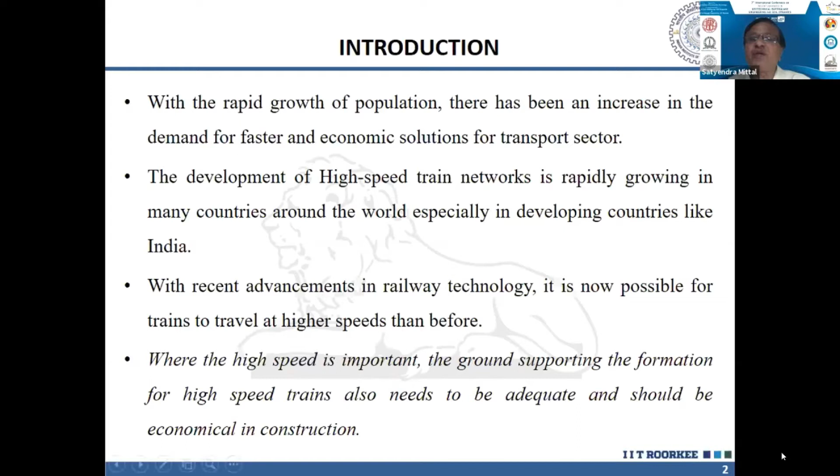This is the rail track adopted by Indian Railways, given in railway code GE-1. My co-authors and colleagues in this session are all very expert, and I know them personally, including the chair and co-chair. Railways, Indian Railways, fortunately or unfortunately, has only one code so far, and this code, GE-1, was prepared by the British long back.

When I started this research project for Indian Railways on high-speed train tracks, I requested Indian Railways to provide me whatever information or codes they have. But I was taken aback and surprised when they told me there is only one code, and on the basis of that, all the trains in India are running.

So this is the code, and you can see the ballast layer, which we generally see whenever we travel by train, and this is the sleeper, and these are the rails fixed on that. Below this ballast is the blanket layer, which comprises the subballast and the cohesionless soil generally. But we generally prefer the locally available soil; if the locally available soil is cohesive soil, then they adopt cohesive soil also.

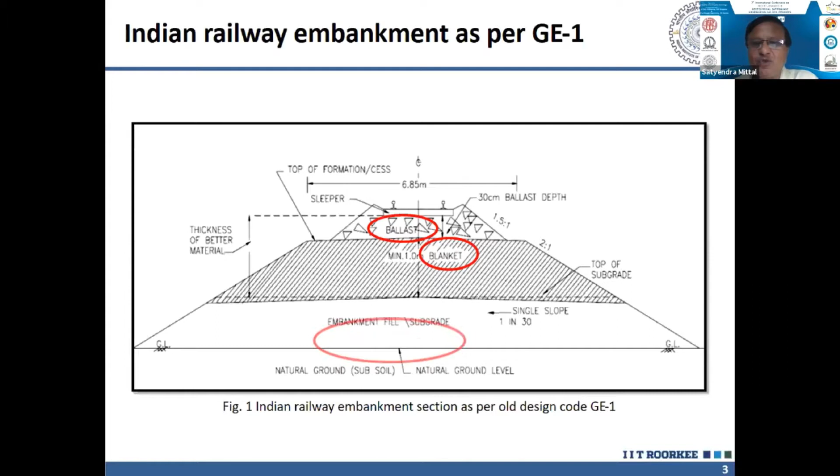The only thing Indian Railways so far adopts is the CBR value. They have divided soil quality into three parts: SQ1, soil quality 1; SQ2, soil quality 2; SQ3, soil quality 3. For SQ1, SQ2 and SQ3, they have earmarked certain CBR values. But when we see codes in other countries—Spanish codes, German codes, codes of other developed nations including Japan—they do not generally use the CBR value; rather, they use the EV2 value, which I am going to discuss now.

Let us see the functions of ballast, important to understand before I come to the main point of my presentation. Ballast, as seen in this picture, is the layer of free draining coarse aggregate comprising graded crushed stone, granite and basalt, used as a tension elastic support for resting the sleepers. This is the main function of the ballast: it transfers the load from track to subballast and drains away the water from rails and sleepers.

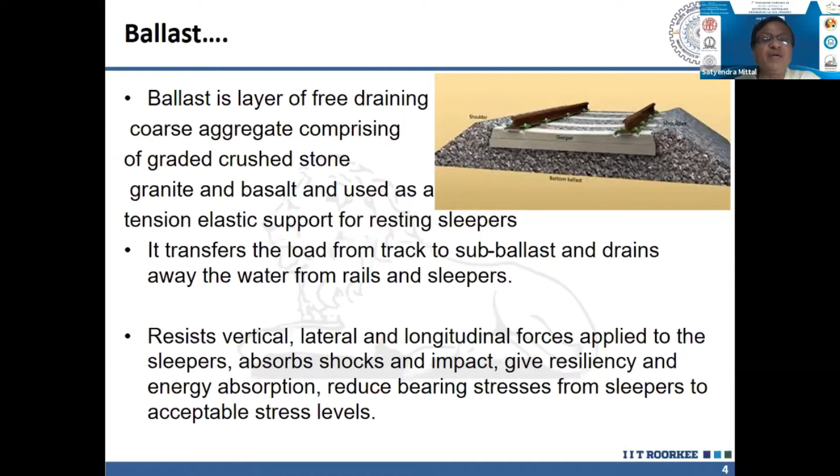It resists the vertical, lateral and longitudinal forces applied to the sleepers. It absorbs the shocks and impact, gives resiliency and provides energy absorption. It also reduces the bearing stresses from sleepers to acceptable stress levels.

Now let us see the function of the subballast, which is just below the ballast. Subballast is also part of the blanket, as I said in the beginning. In this picture we can see that this is the blanket layer, and this is the train through which I took this picture.

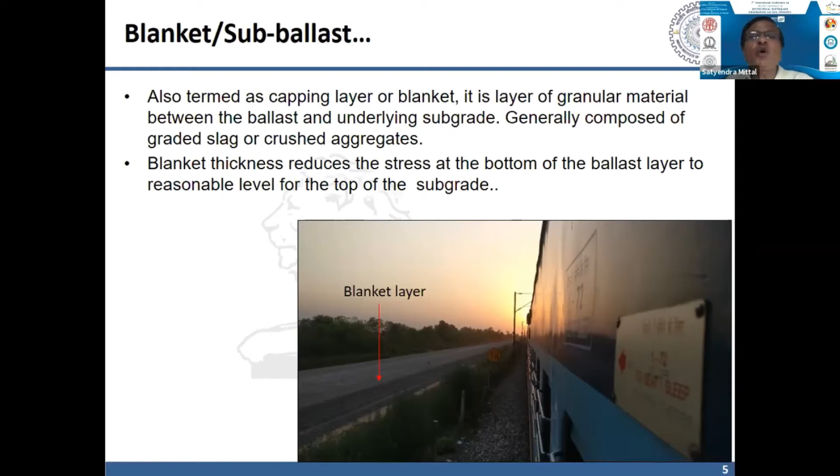The subballast is also termed as capping layer or blanket. It is a layer of granular material between the ballast and the underlying subgrade. Subgrade is the naturally available ground where the rail track is proposed, generally comprising graded slag or crushed aggregates. The blanket thickness reduces the stress at the bottom of the ballast layer to a reasonable level for the top of the subgrade. So these are the functions of the blanket and the ballast.

Now this is the subgrade layer, which is naturally occurring strata at the site. The subgrade is the foundation to the entire railway structure, as it transfers load to the natural ground. If the quality of the soil is not adequate, it must either be replaced with a stiffer material or be reinforced. So if the soil is very bad at the site, maybe cohesive soil, or still worse soil, or the area is in a flood zone, then we lay some soil and create a subgrade.

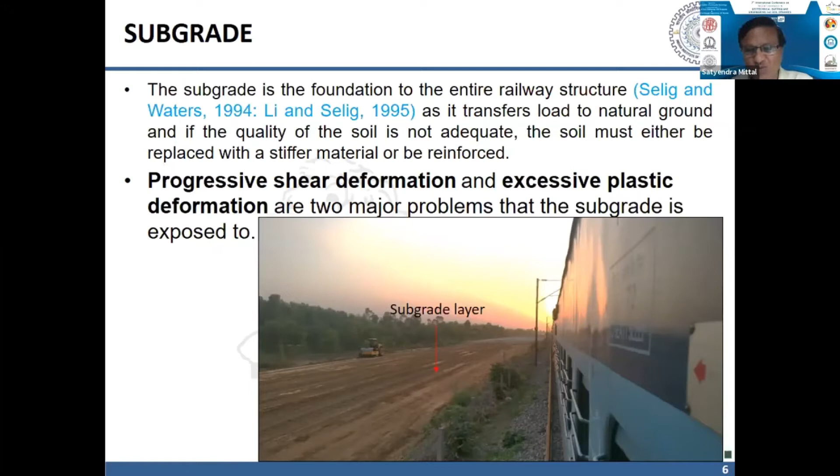Then the next part is progressive shear deformation and excessive plastic deformation, two major problems that the subgrade is exposed to. So let us try to understand what is progressive shear deformation.

Let us say this is the clay subgrade, and above this we provide the blanket, the subballast and the ballast, an all granular layer, and then the sleeper like this. This is a stable site, but when it is clay soil, due to the frequent movement of the train, the clay subgrade behaves like remolded clay, and this generates heave, as we can understand from this figure.

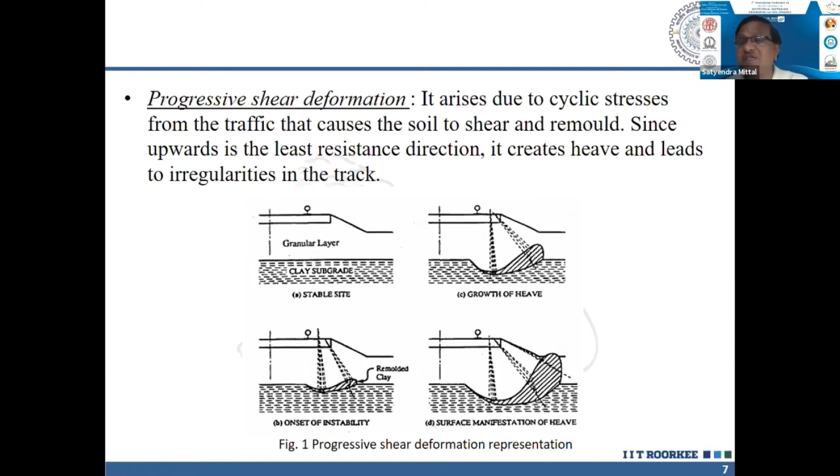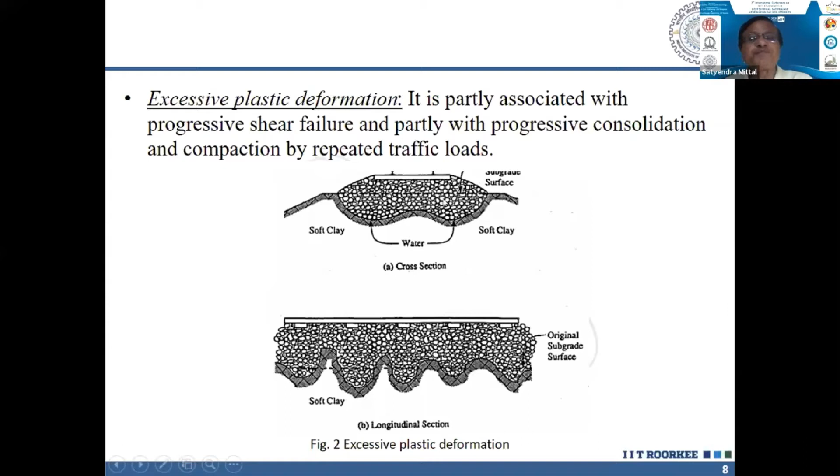Due to this, there are frequent deformations and distresses developed into the rail track, which also leads to plastic deformation. Plastic deformation is partly associated with progressive shear failure, because if shear failure is progressive in nature it leads to plastic deformation, and it's partly associated with progressive consolidation and compaction by the repeated traffic load. So this is the cross section and this is the longitudinal section of the clay subgrade area.

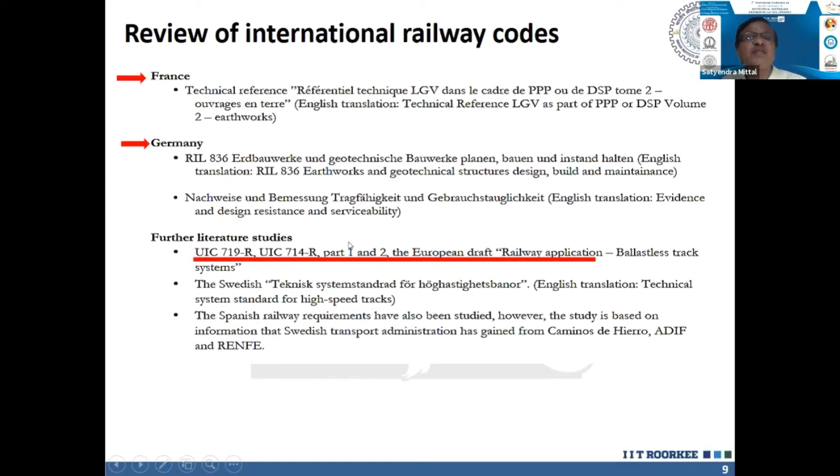These are some codes followed by us in our research work: the French codes, the German codes, and others also adopted in the present research. These are the UIC codes, adopted mostly by European nations. We have also studied the Swedish codes, because these are really very nice codes. In India also, since I am part of the team of High Speed Rail Corporation, I insisted that we should use the EV2 value, which I am yet to discuss.

Friends, from these codes, the essence is that the earthwork is highly dependent on its compaction quality. As per UIC code 719, the compaction should achieve minimum deformation modulus with a homogeneous distribution. This is a very important point.

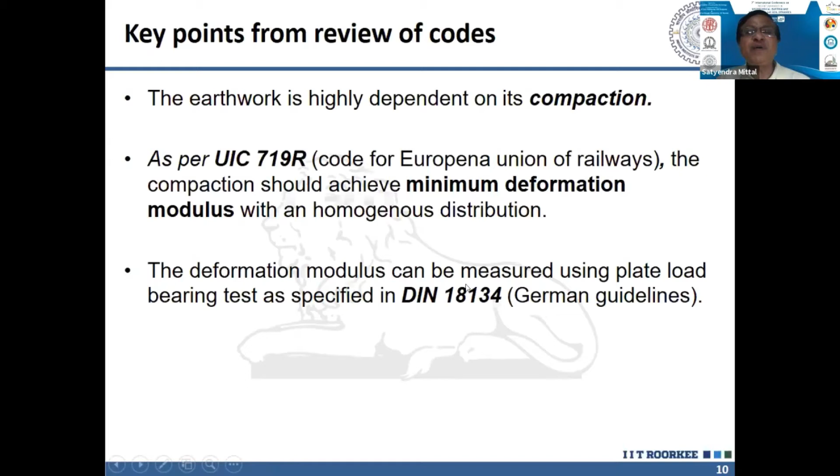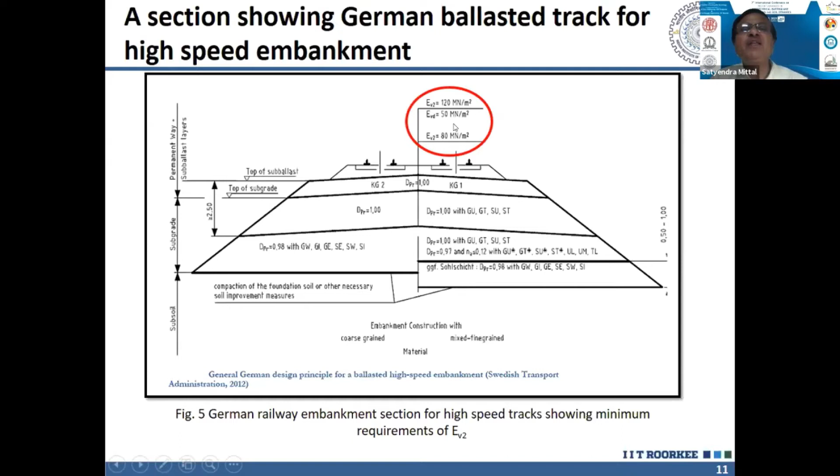The deformation modulus can be measured using the plate load test as specified in DIN 18134, the German code. This is the rail embankment adopted by the German railways. Here we can see that they do not consider the CBR value like in India. They consider the EV2 value, and EV1, EV2 — these are the important parameters they have created, and mostly countries in Europe are adopting the EV2 system only.

This was the Indian Railway embankment, as I had shown you earlier. Now, with my constant insistence on the Indian Railways, that code has been revised, and this is code GE-14. With my constant persuasion with the Indian Railway authorities, they have now agreed to include the EV2 value also in the Indian Railway codes. So if EV2 is about 100 MPa, it is equivalent to CBR 25. In the near future, Indian Railway will never talk of the CBR value, because CBR is now an obsolete parameter.

Similarly, this is for the ballast and subballast area, blanket area. For the area below this, the embankment fill, the EV2 should be, in any case, minimum 45 MPa.

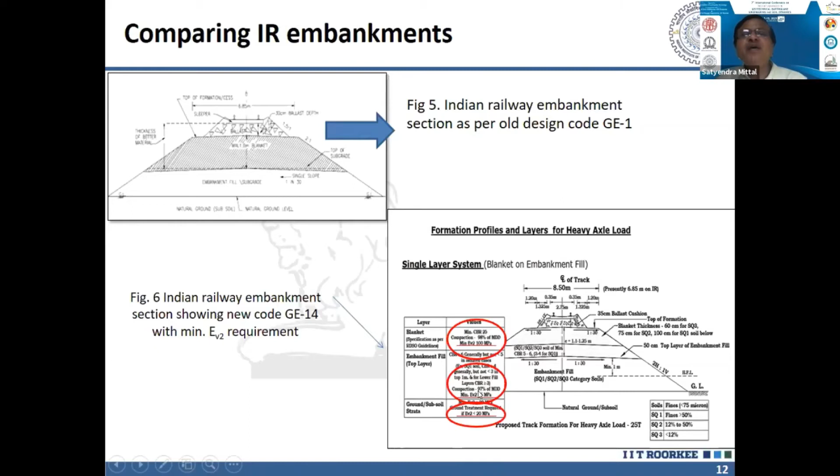So EV2, how do we achieve EV2 value? That I will explain to you.

On comparing old and new section from the design code, it can be seen that the height of the embankment has been increased with the inclusion of the blanket layer and by addition of the embankment fill. Well friend, this point I have to elaborate a little more.

Due to the lack of knowledge in Indian Railways so far, they were talking of CBR only, and wherever higher stiffness or higher resilience was required, the railway engineers - I had been interacting for the last 2 years with the top engineers of Indian Railways - I asked them what they will do with high speed rail. They say they will increase the blanket layer thickness.

You see, that is the irony of the fact that they have only limited knowledge - that if we increase the blanket layer thickness, the stiffness of the rail track will increase. It's an irony. Whereas you all will agree with me that blanket layer material is a mining material, and in India mining is banned now. Only limited mining is allowed, that too for national projects. So because mining material is a luxury, we have to look for alternate solutions.

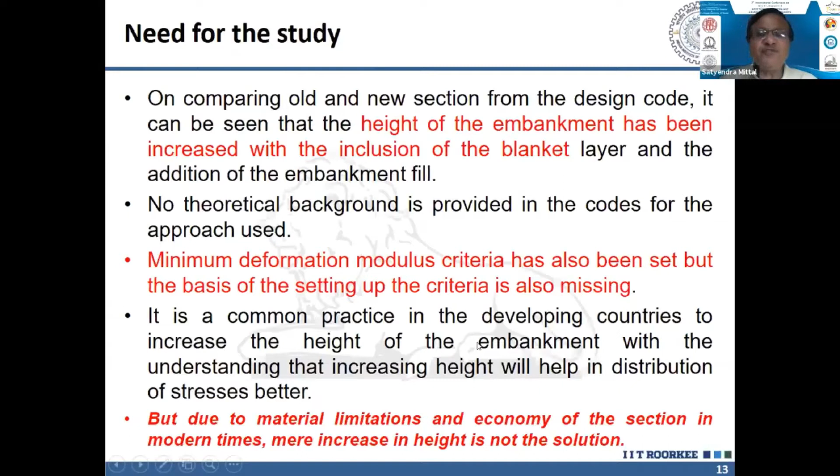So now the deformation modulus criteria - we will see what is the deformation modulus criteria. As I said, my presentation is limited to the laboratory test results only.

So now whatever laboratory results we have achieved, we have compared it with the European codes, and now we have also determined the deformation modulus of the embankment. I will show you that by adopting the deformation modulus criteria, which Indian Railways was never adopting, how economically the rail tracks can be created or constructed for high-speed trains.

So the study is planned to find out the minimum required deformation modulus for the design of the Indian Railways embankment, to economize the section. This is the main focus of our research work.

So now friends, I have tried to explain in very simple terms. Load intensity as per the German code required for a good rail track is 500 kN per meter square. This is the recommended value for high-speed trains in Germany.

Now, if I talk of the length of the sleeper in India, it is 2.75 meters as per RDSO guidelines, and the average width of the sleeper is around 246 mm. So if I calculate the area as 2.75 into 0.246, and multiply it with 500, then I get the load around 34.49 tons.

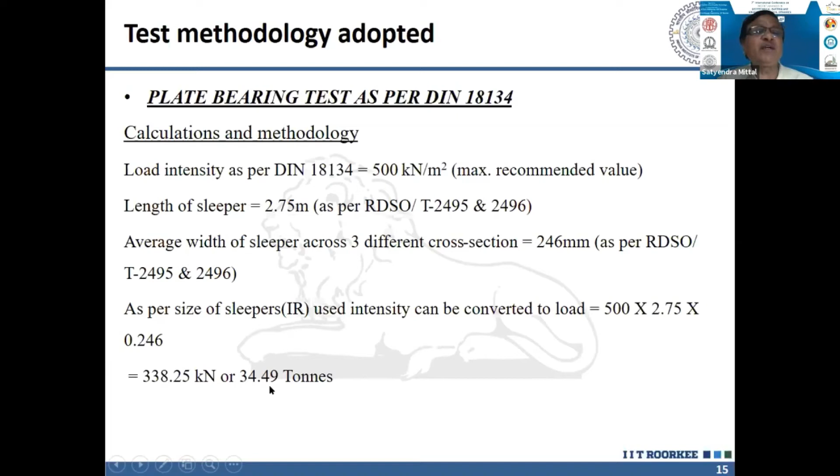That much load comes on the sleeper. As per Indian Railways loads, generally most tracks in India are designed for 16.5 tons load. Germany designs tracks for 35 tons and sometimes more.

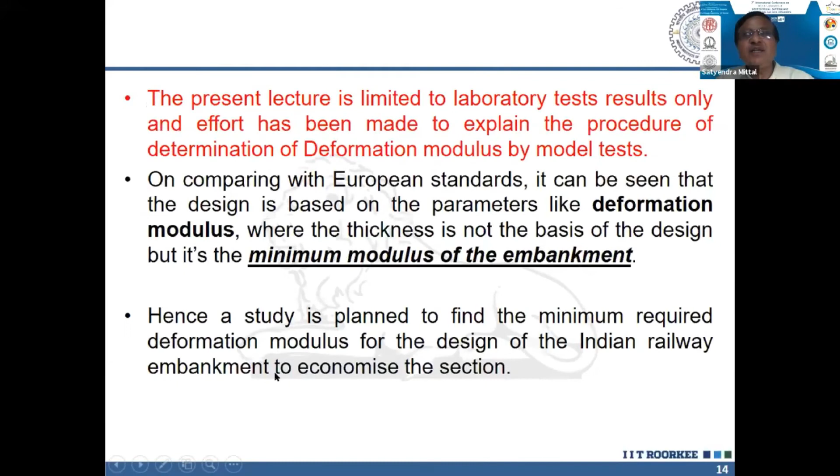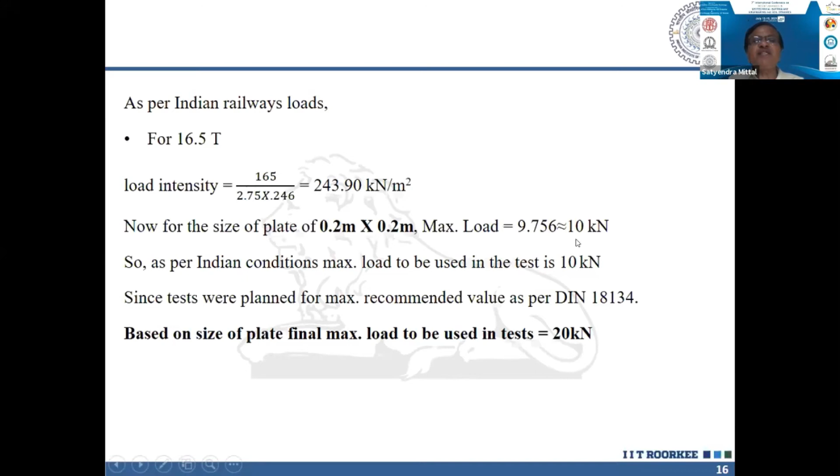So now if I calculate the load intensity for 165 kN, meaning 16.5 tons, the load intensity required is 243.9, and if I multiply it with the size of plate which I have used, we require the maximum load as 10 kN. So as per Indian conditions, the maximum load to be used in the test is 10 kN. Whatever is the test plate, accordingly we can designate the load required for the model test.

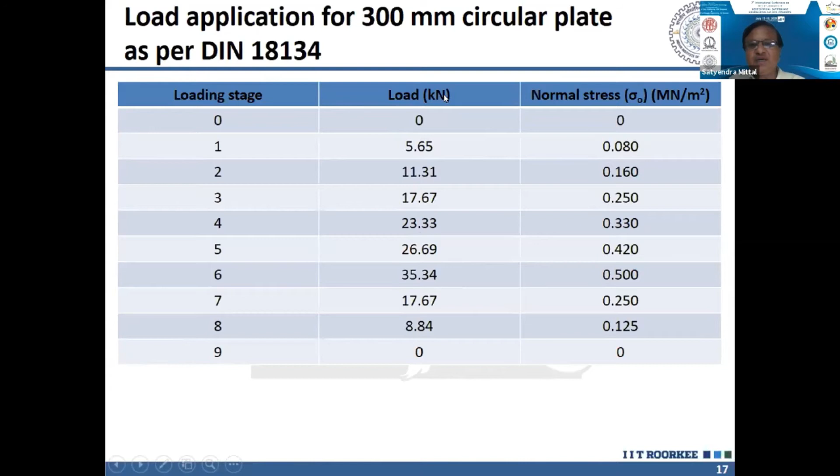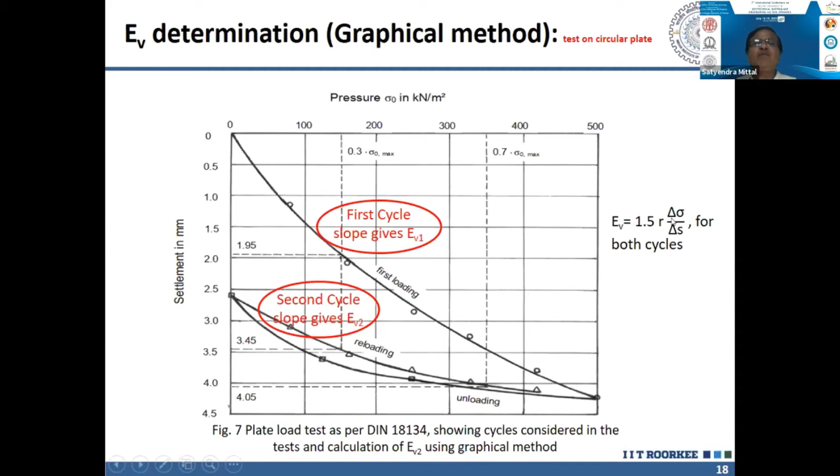EV1 or EV2 follow a general formula for calculation: 1.5 into R, where R is the radius of the test plate, and delta sigma upon delta S is the slope of the curve. This is the formula used for computation of the EV value.

Now, for calculating the settlement of the rail track, this formula is used: S equals A naught plus A1 plus A2 into sigma naught square. Here sigma naught is the average normal stress below the plate, A naught, A1 and A2 are the constants of the second degree polynomial, and S is the settlement of the loading plate.

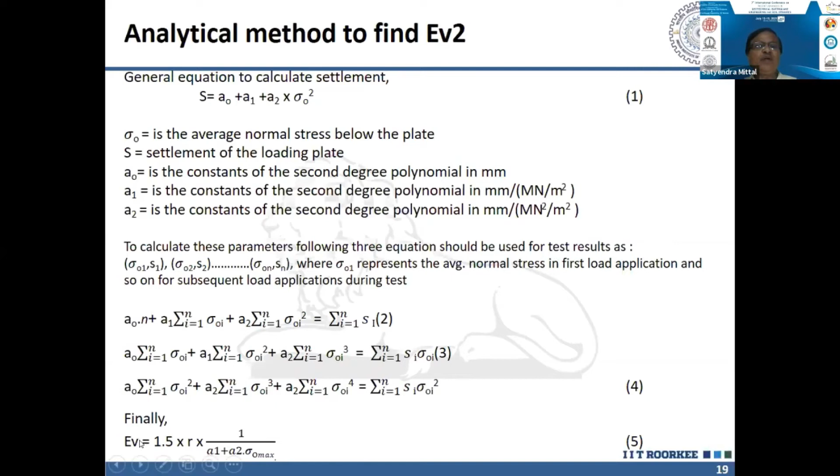A naught, A1 and A2 are calculated from three equations. We have three equations and three unknowns, A naught, A1, A2, and by solving these equations we can calculate them, and after that finally calculate the settlement, and then finally calculate the EV value also.

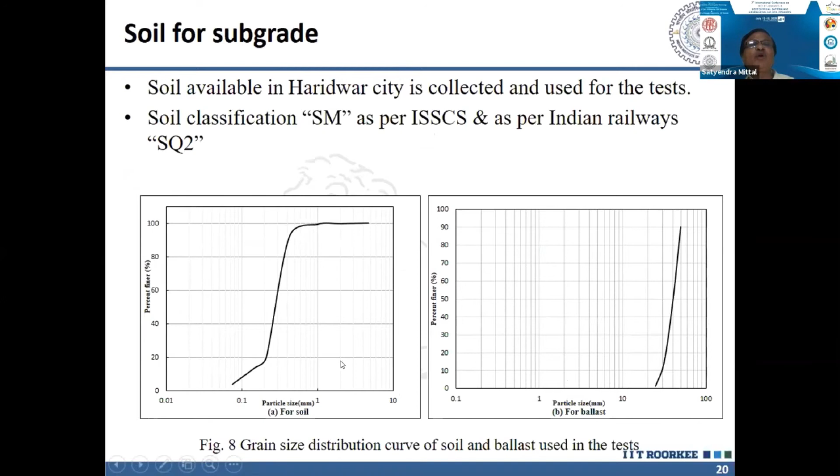These are the grain size distribution curves of two different types of soil - this is for ballast and this is for the soil which we used in our model test. The soil classification was SM, collected from Haridwar. Haridwar has a very big yard of Indian Railways, so they provided us the actual soil of the track where the high-speed rail track had to be constructed near Haridwar also.

Although we have done more than 100 tests, I am limiting this presentation to just 5-6 tests. The objective was to find the minimum thickness required for a suitable EV2 value for the high-speed rail track, and the parameters we adopted were as per the German code only.

What were the combinations? We took the subgrade of varying thickness to find the suitable thickness of the subgrade, because our economy starts right from there. Second, in the subgrade we used varying blanket thickness, because the blanket occupies the maximum mining material, so there also we wanted to economize the blanket thickness. Then subgrade plus blanket plus geogrid, then subgrade plus ballast, meaning after removing the blanket totally - subgrade and ballast only.

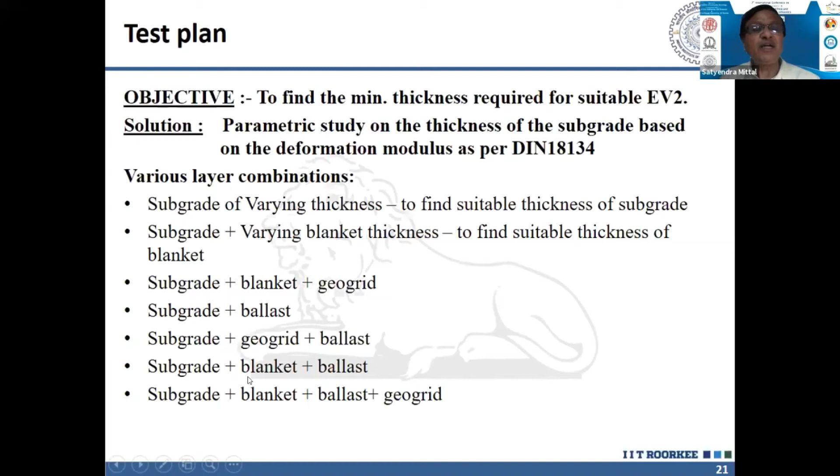Then subgrade plus geogrid plus ballast, then subgrade plus blanket plus ballast, and then subgrade plus blanket plus ballast plus geogrid. So for all these cases, we have determined the EV2 parameter.

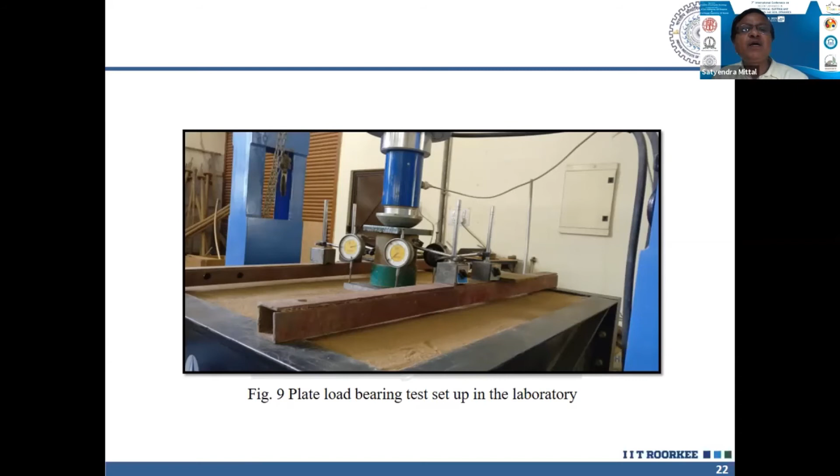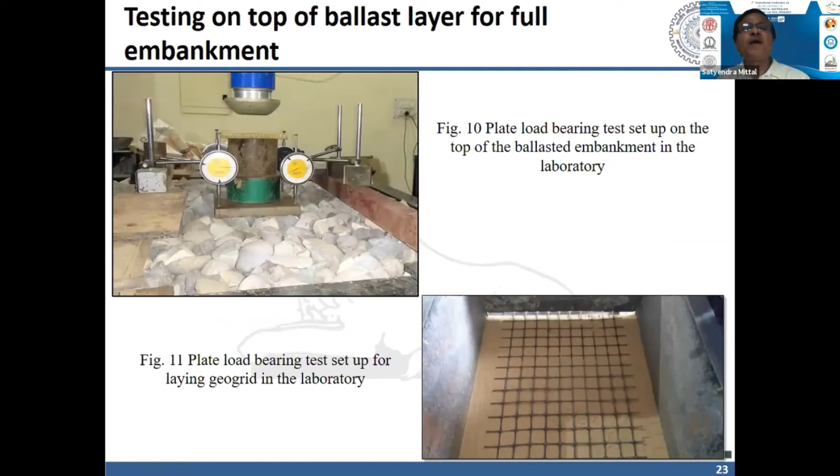So friends, this is our test setup in my geotechnical lab. The same ballast which Indian Railway had provided us was used, considering that it is a ballast layer for the full embankment - right on the subgrade, totally ruling out the blanket layer and providing the ballast embankment only. This was, of course, with the geogrid.

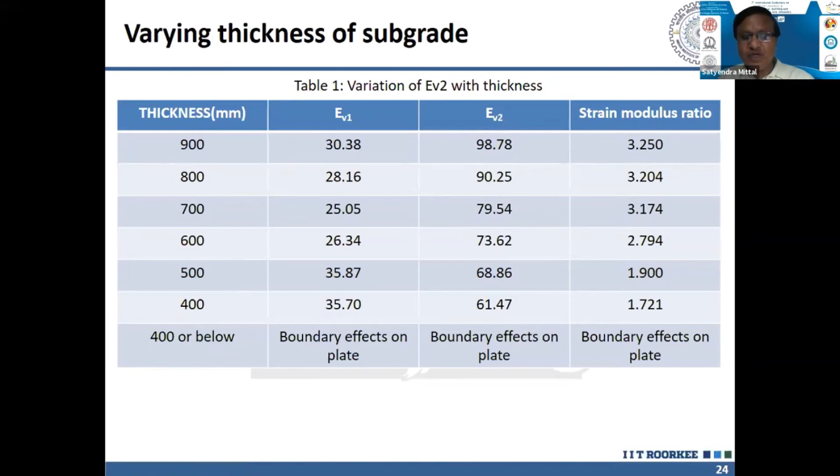So now you see, we had chosen different thicknesses of our track, and then EV1, EV2 values were computed by the same test, the pictures of which I had shown you just now. And you see, if I take the ratio of this and this, the strain modulus ratio comes out as 3.25, and ultimately the modulus ratio is very important for designing the advanced tracks for high speeds.

So here it is a subgrade of 400 thickness, and EV2, as I had shown in the initial slide - now GE14 of Indian Railways, which has been revised after my persuasion, says that the minimum required EV2 value for subgrade should be 45. And you see, simply by doing our analysis and convincing Indian Railways, I had shown that simply by proper compaction and by trying this methodology which we have evolved, the EV2 value achieved is 61.47, which is higher than 45, the minimum required.

Similarly, where the subgrade is of 500, we got the EV2 value as 68.86, so the required modulus is achieved there too. Then we tried the subgrade of 500 plus blanket of 200, and we got the EV2 value still higher, 86.54.

For this blanket combination, the minimum required EV2 is 100. So we tried some more permutation combinations, and using a single layer of geogrid, we got the EV2 value as 100. So the required thickness of the blanket, as per the Indian Railway specification, is subgrade 500, blanket 200, now with one layer of geogrid. Then, if subgrade is 500 and ballast is 300, we got the EV2 value higher than 100.

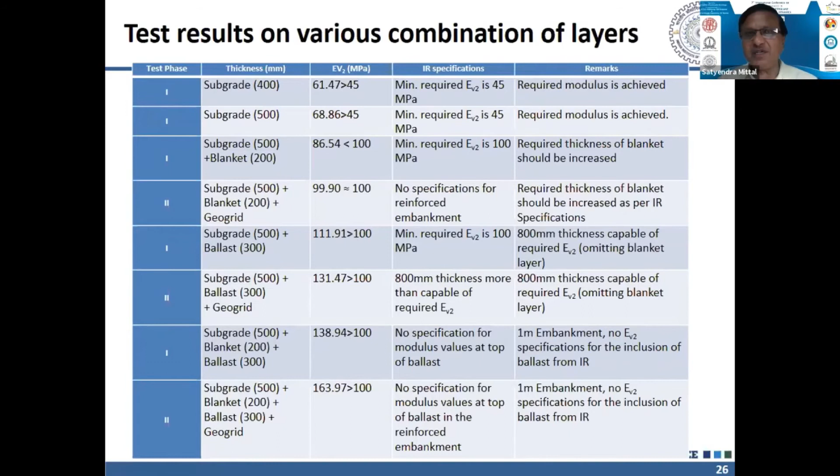When we showed these results, the tests were conducted in the presence of railway engineers, and now they are well convinced that EV2 is the right parameter for designing the rail track.

Now let us see the results we obtained from our current model test. We got the EV2 value as 138.94 when our track was ballast 300 and blanket 200, and the subgrade was 500. This is the model we created in our large-size steel tank, the picture of which I had shown you.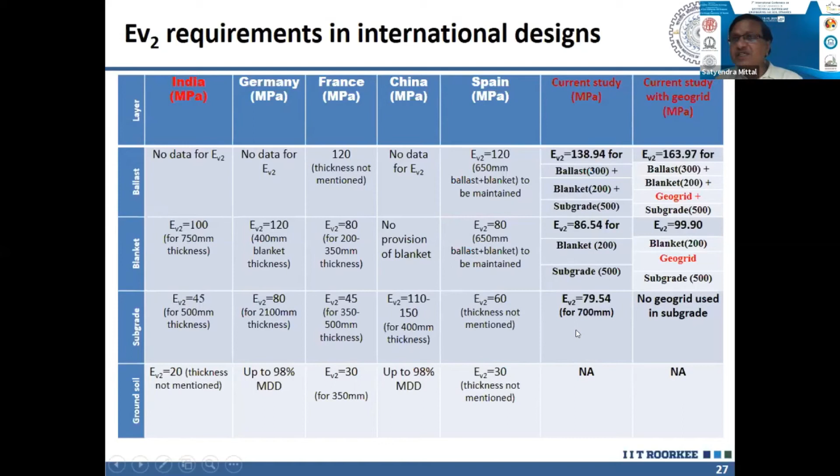This value is further increased to 163.97, and then this value was increased to 99 by using a geogrid, and here this value is already higher than 45. These are the advantages, and now we are able to convince the Indian Railway authorities.

So these are the comparisons of the Indian Railway design with the current study. They had been adopting the thickness of the top layer of embankment fill as 500 mm, and we are also adopting 500, because the Indian Railway authorities were not agreeable to reducing this embankment fill at all. So we kept this the same.

Now for SQ2, second quality of soil, they were adopting 750. We have shown them, by conducting the actual prototype test in our laboratory, that a 200 mm blanket thickness is good enough. Similarly, the ballast thickness on top was 350; now we have shown that 300 mm is good enough, because once I get the required EV2 value at 300 mm — and EV2 is a well-adopted parameter by all developed nations — we should also adopt it.

So the total height of embankment in Indian Railways is generally 1.6 meters, but now in India we can have a 1 meter total thickness of embankment. These parameters are for the no-flood zone. If the track is passing through a flooding zone, then the Indian Railways add a further 1 meter.

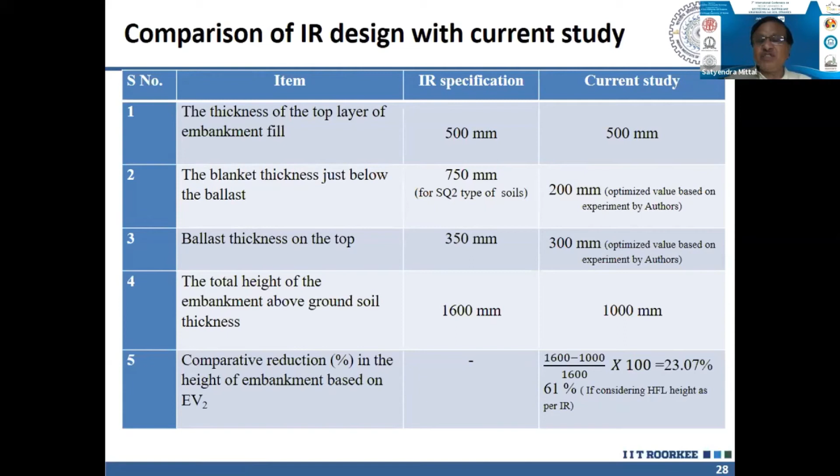So if I compute the economy achieved by adopting the EV2 parameter using 1600 mm, the economy is higher than 23%. And when I use 2600 mm, by adding 1 meter for the flood zone — meaning the additional height chosen to meet flood eventualities — then the economy is 61%.

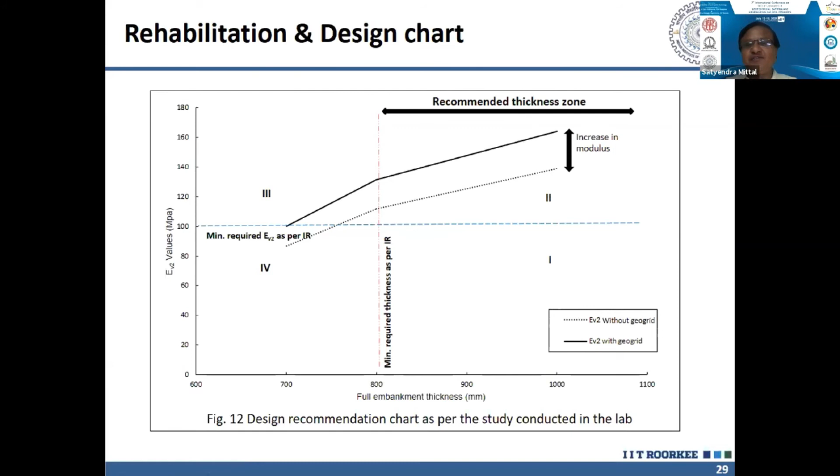You see this dotted line, this is the EV2 value without geogrid, and this solid line is the EV2 value with the geogrid. This is the increase in the modulus value simply by using one single layer of geogrid. This curve I am showing you only with the single layer of geogrid. We have done a lot of tests using 2 layers of geogrid also, and there it is a phenomenal growth in the value of EV2.

Friends, I would like to conclude now that deformation modulus can be used as a parameter to evaluate the performance of the embankment with the design values. Deformation modulus is very sensitive to the compaction effort applied to the underlying layer. Hence, degree of compaction control should always be of high quality.

Then, to meet the required deformation modulus EV2 now set by Indian Railway, the height of embankment can be reduced, because earlier they were believing only in the CBR value. But now, fortunately, I have deviated their mind, meaning the mind of the Indian Railway engineers, so that now onwards they will be using the EV2 value. The total reduction in the height of embankment based on the modulus values is nearly 23%, and geogrids, as expected, enhance the EV2 value by 28%.

In addition to other benefits, there is reduction in the breakage of ballast and prevention of the penetration of ballast into the subgrade. As we all experts sitting in this session know, when we provide the geogrid, it provides a positive confinement to the ballast, and because of that the ballast do not migrate to other places due to movement of the fast speed train. So the ballast remains in its position only, and by that it provides further confinement to the overall rail embankment.

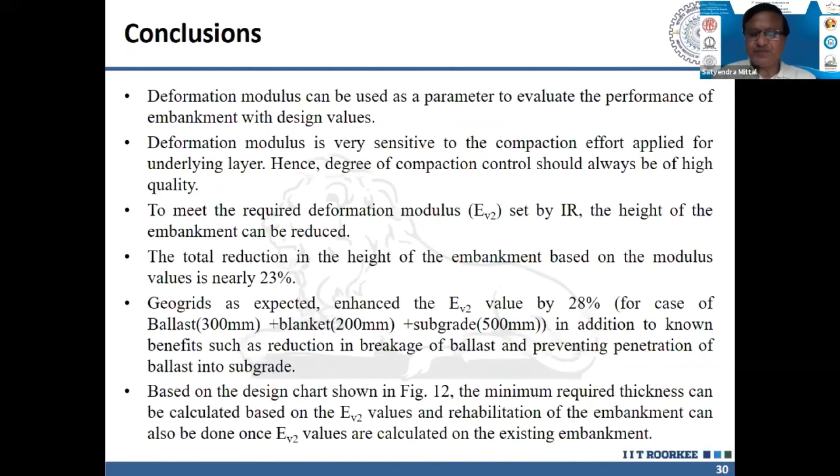Thank you so much. If anyone has any question, they can ask. It is in the question and answer. I think Professor Mittal, can you see please? What are the questions, if any? Yeah, I think there is no question. There is no question. I have one question, sir. Professor, yes, please.

You have developed that plate bearing test apparatus in the laboratory? Yes. Does it have any standard specifications? Because you referred some German or Sweden? Yeah, Sweden, German, and like I said, we have conducted a lot of tests, but now we finally followed the DIN, that is a German code. And according to that, whatever is the track size that we have created in the laboratory, the model test.

Nice. What about boundary effects, sir? Because you used a plate. I had written in the slide that the plate size was chosen in such a manner that there is no boundary effect. It is 1/5 of the tank area, tank size.

Sir, is it a cyclical, repeated load test, right? Yes, it is a repeated load test. So when we do this cyclic plate load test, I think we will get what is called elastic deformation. In other words, I can use what is called modulus of deformation. Yes, that's right. Because you are using EV2 value, which is in kilonewton per square. Yeah, yes, the same thing applies here also.